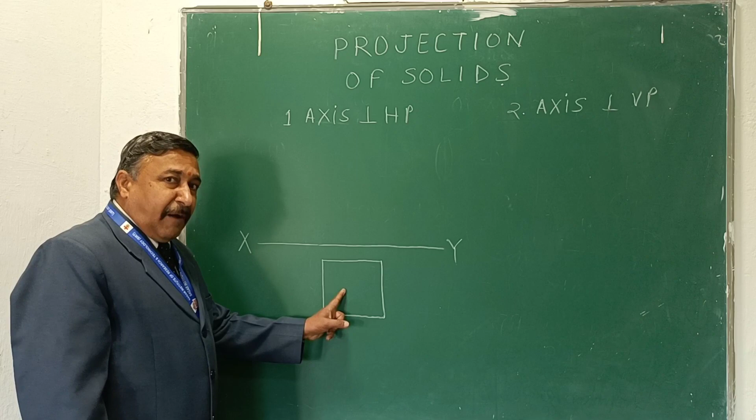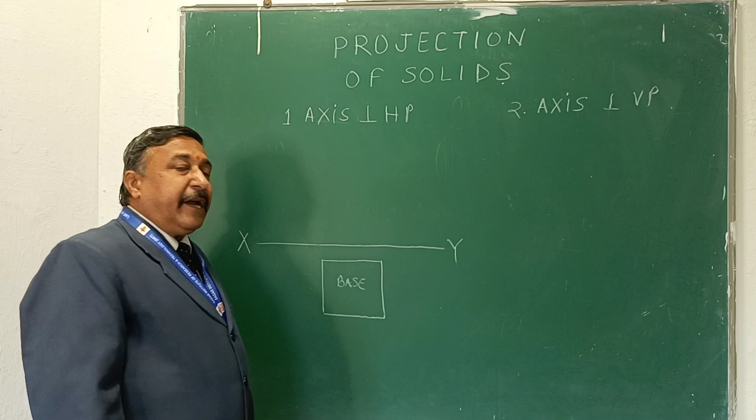So when we draw top view, that is base, we always have to draw base first. Remember this: every question of projection of solid starts with base. We have to first observe in which view the base is visible, either front view or top view, and start our problem from there. So this is our base, square prism, square.

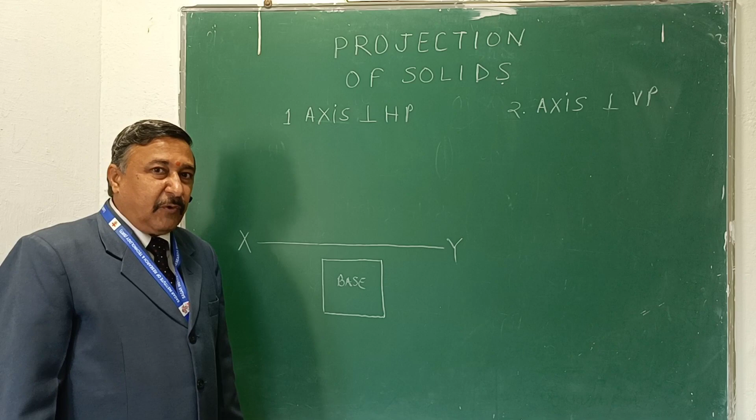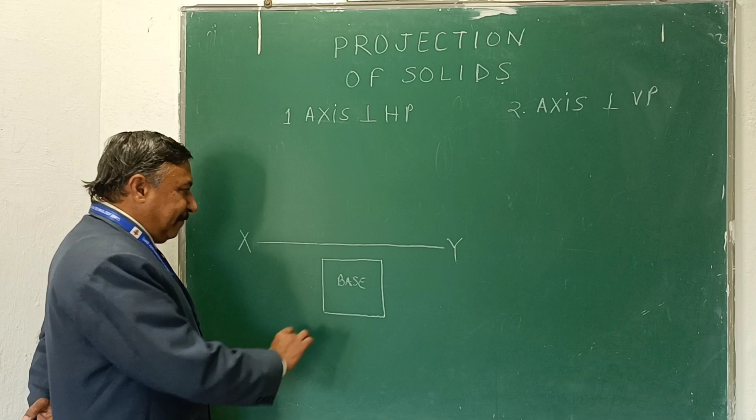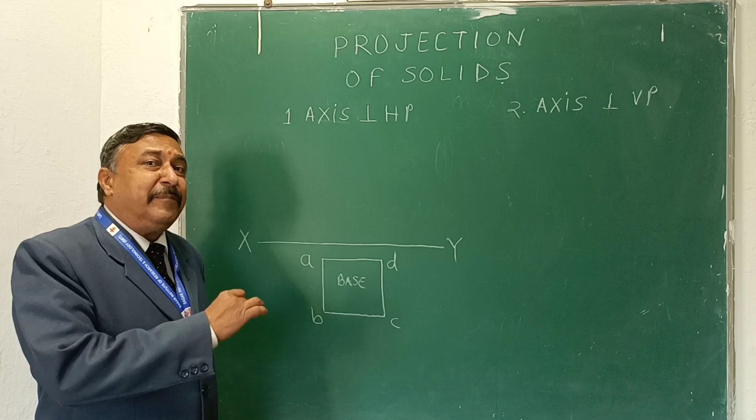Now we have to name it or label it. This labeling is very important. As usual, if we name A, B, C, D - but this is a square, a square plane.

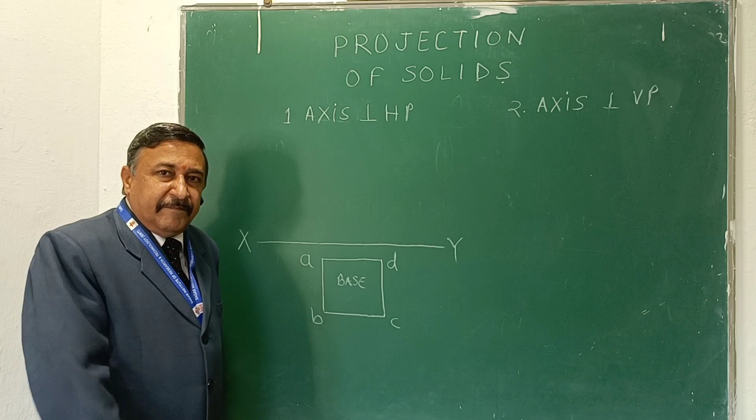Just imagine how many squares of this type are in a square prism. There is one base and one top, meaning there are two squares in square prism. So we have to name the second, the top, also like this: A, B, C, D, E, F, G, H.

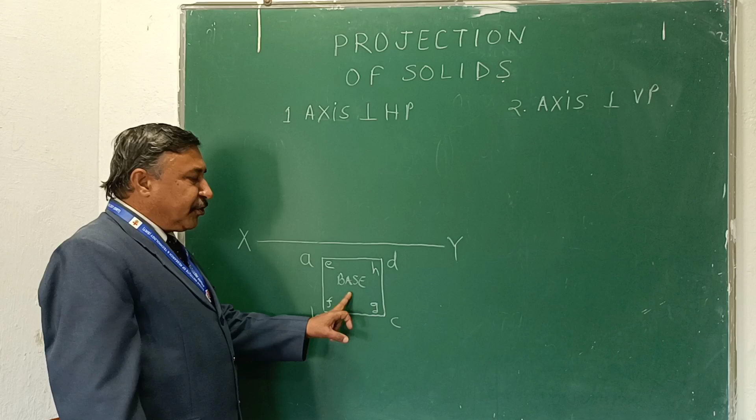Both are overlapping, just one above the other. This is the system of labeling or naming in solid, because this shows there are two squares in this solid, and this represents the prism or base of prism.

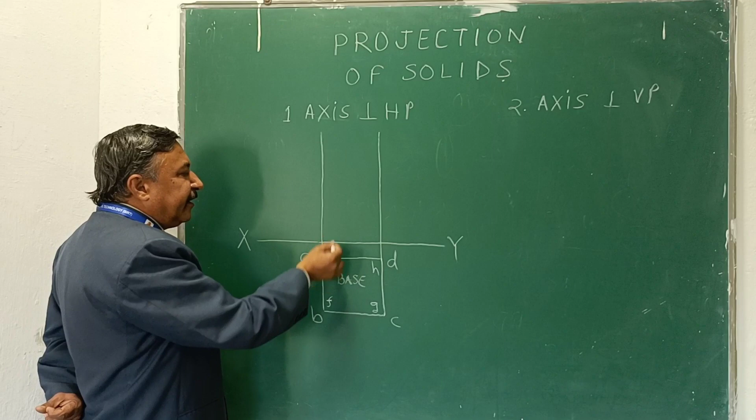Now we have to draw the next view. Just project it, and this is the base. Now we have to draw the face, meaning what is the height of the axis of prism. So the height of axis of prism we take here.

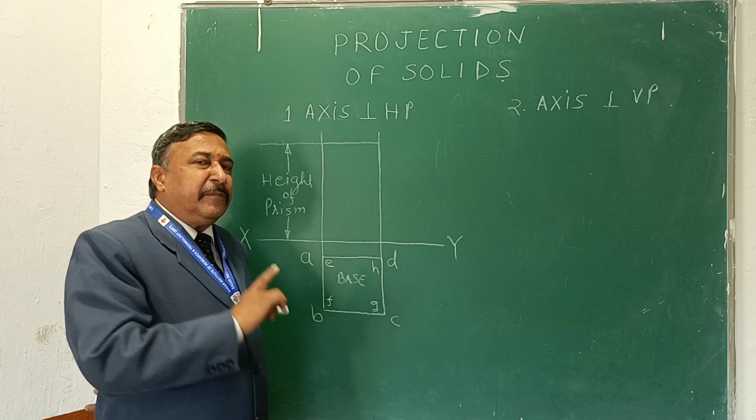This is the height of prism or axis, whatever is given in the problem, and we just close from here, so this is one rectangle visible. If we observe the square prism from front, we have to observe only one face - another face is just perpendicular, so it is not visible.

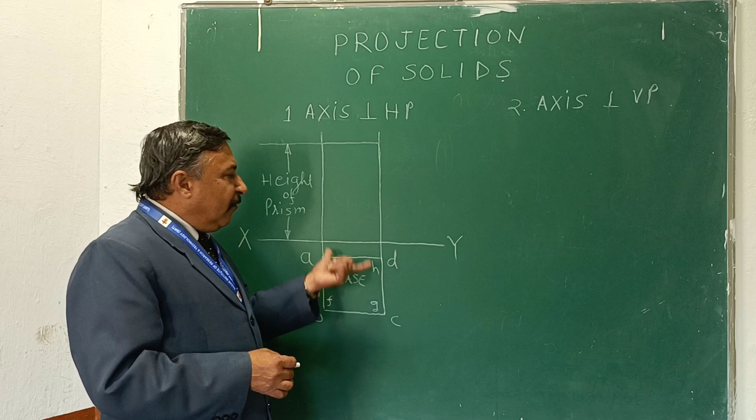Another face is also not visible, and the back face is also not visible, so only one face is visible. Now we have to show axis in this prism, so at center - or we can find the center like this - draw the rectangle, draw the diagonals of the square base.

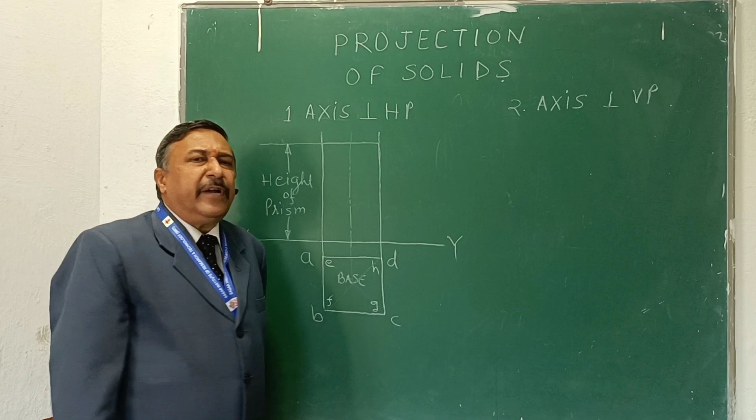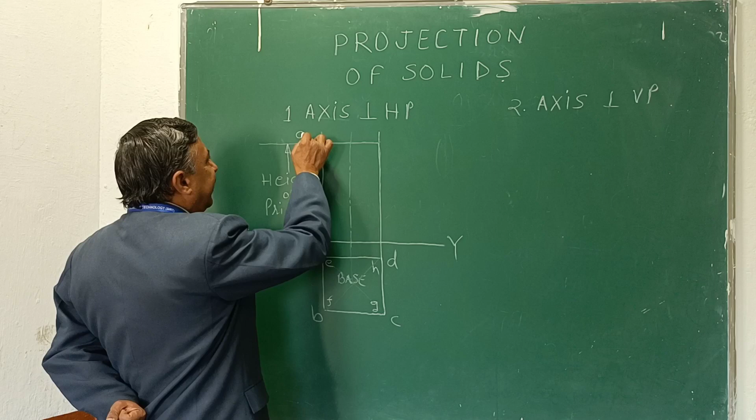This projector gives you the position of axis, so we have to show axis also. Now labeling A, B, C, D - suppose this is top, this is the top square. So we have to name here A dash, B dash, this is C dash, this is D dash, like this is E dash, F dash, G dash, and H dash.

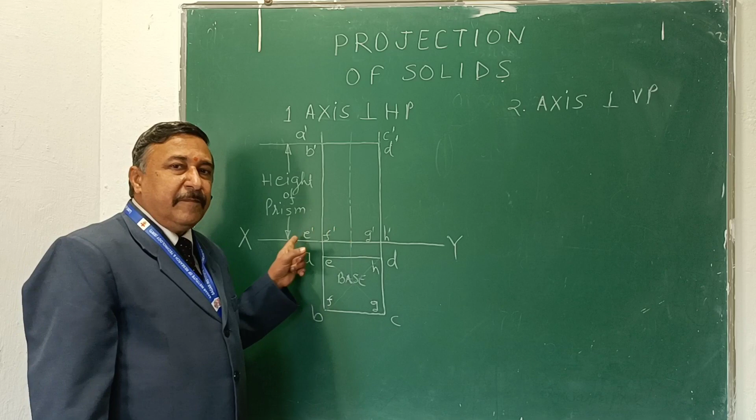So one naming right, here outside the view we mark at the top, and inside naming we mark at bottom. So this is the position axis perpendicular to HP, and this is the system of drawing projection of solid - complete naming, complete showing. No need to write face here, actually this is face, but no need to write face or base, this is only for understanding point of view.

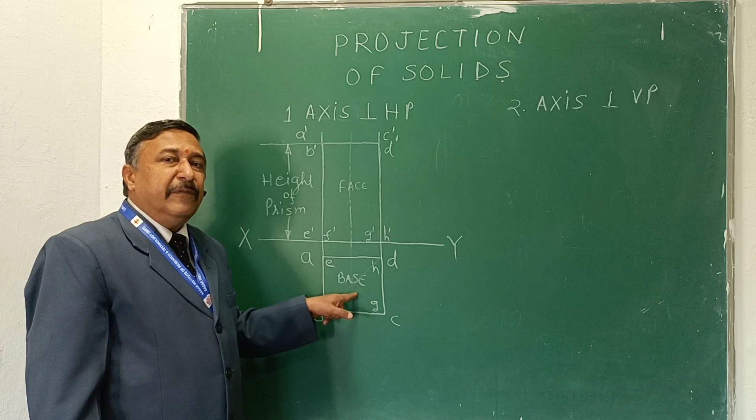Now if we have to draw the other position of axis, that is axis perpendicular to VP - if axis perpendicular to VP means we can think that base is in the VP, and when base is in the VP, it will be seen in front view. So first we have to draw front view instead of top view, because base is in front view. So if base is in front view and face is in top view, it is axis perpendicular to VP.

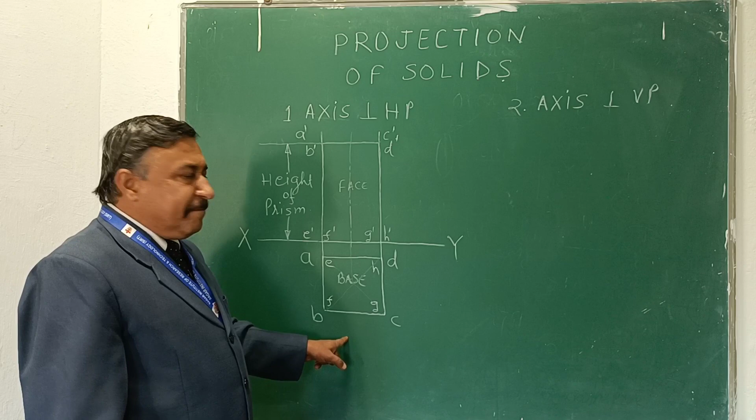So it is just the opposite position. I have to draw and complete this also, showing how we draw axis perpendicular to VP. You know this whole process - first we have to draw base, so this is our base.

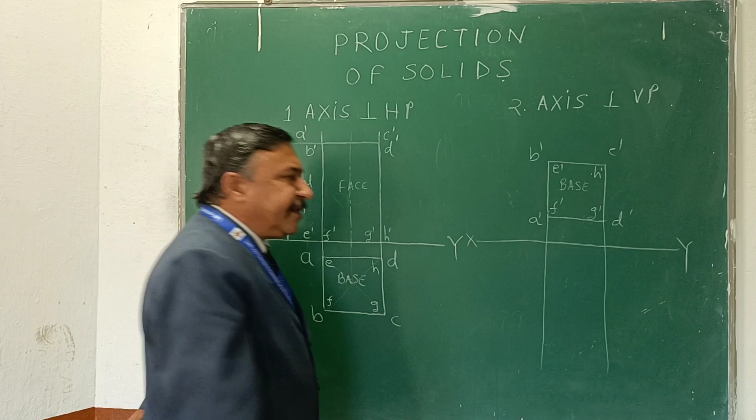This is our base, and it is in front view because the axis is perpendicular to VP. Now we have to project it and complete this face.

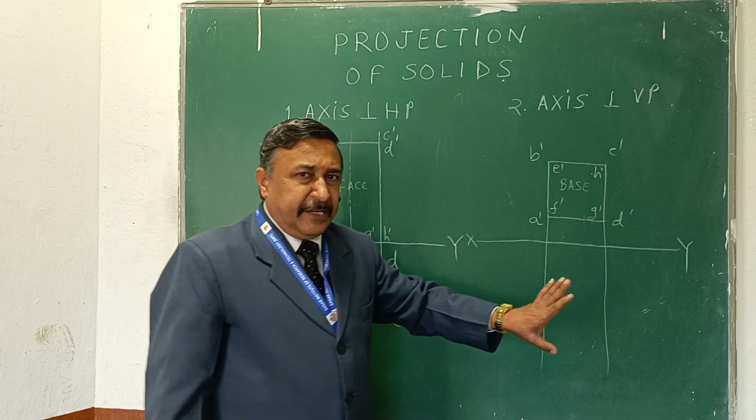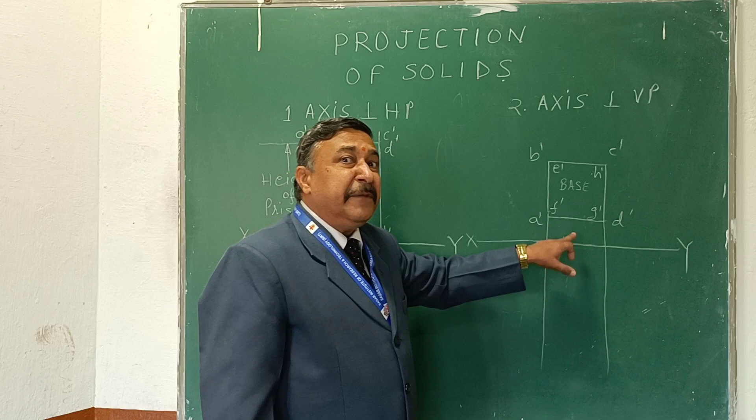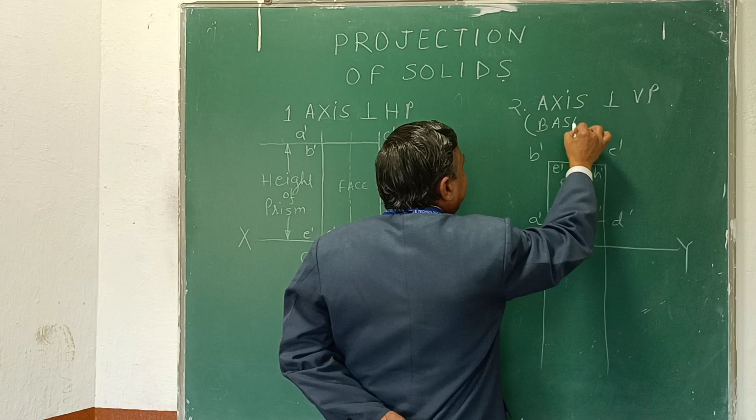If the base is on HP, meaning only the axis is perpendicular to VP and the base is not in VP, then we can start from anywhere here. But if it is given that the base is in VP, we start from here. So we can write here base in VP, and just like this, we can write base on HP here. This will clear any type of confusion.

So we start from here. This is the height of the axis, either height of the axis or height of the prism. This is height or length of axis, anything.

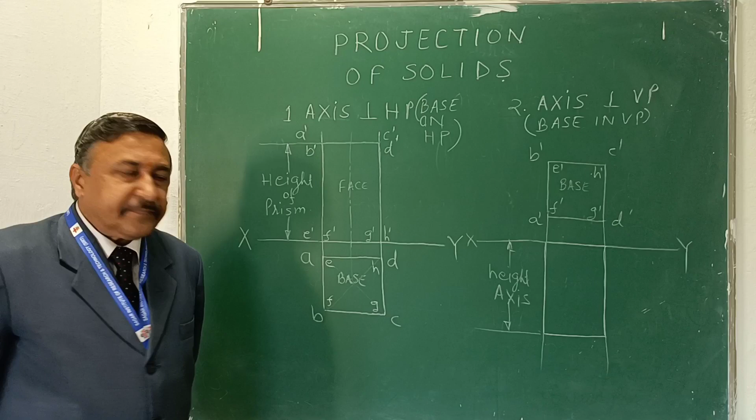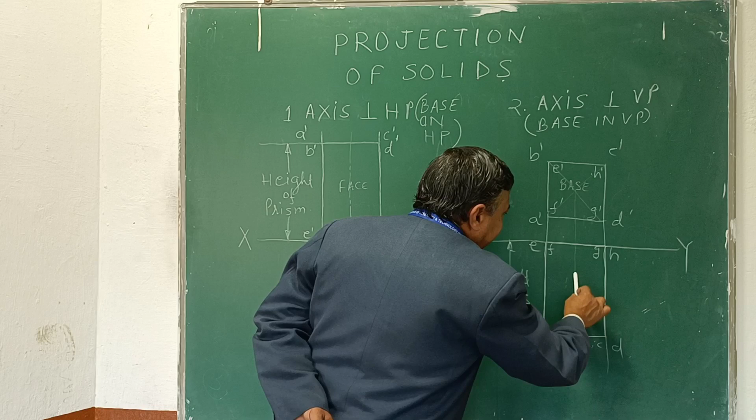So just like this, you know the process. The process is same: mark these outside points, either at top, and these inside points at base, anywhere, no problem at all. Now mark the position of axis. By drawing the diagonals, we can draw the position of axis. This is the position of axis.

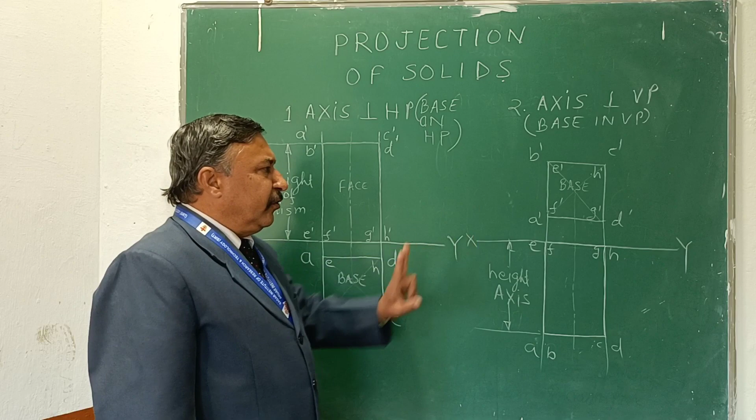So these are the two questions: axis perpendicular to HP and axis perpendicular to VP. Now you know both the positions.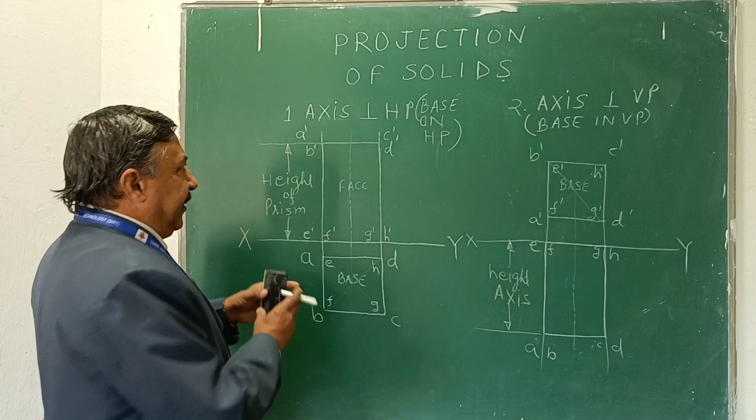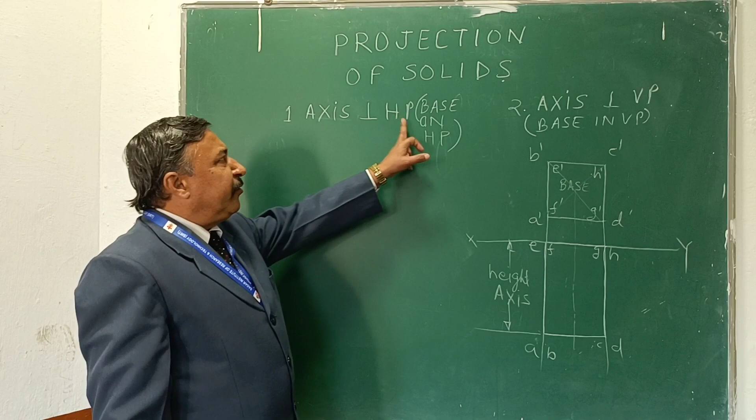Same thing: axis perpendicular to HP, base on HP, but the example is of a square pyramid.

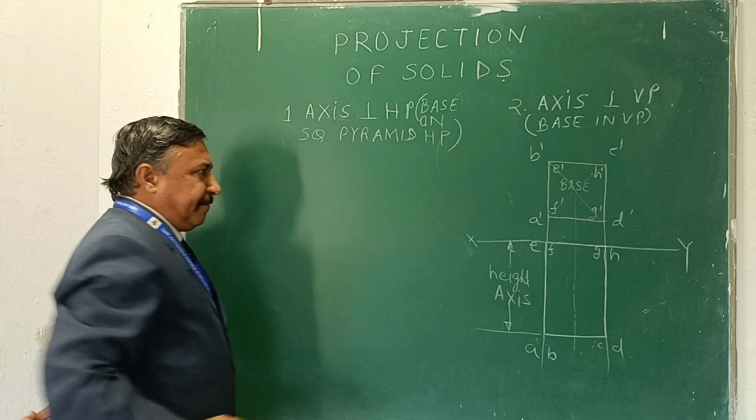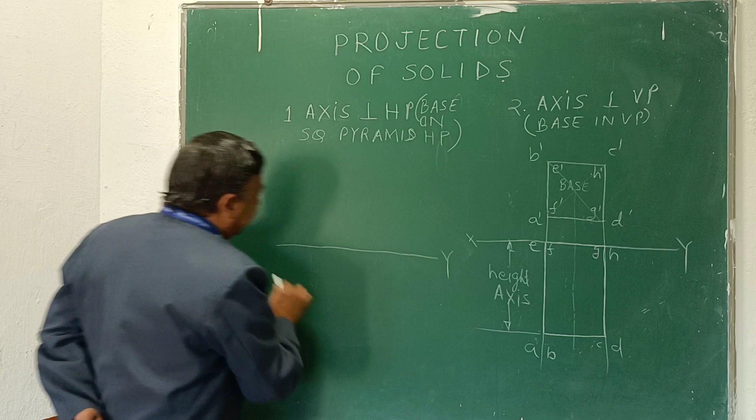So what are the changes you will see here? How do we draw the projection of a pyramid? Same thing: you know that base on HP means axis perpendicular to HP and base comes in top view. So first we have to draw the top view. This is our top view. Square pyramid has a square base.

Base square. But now just observe that in the square pyramid, the apex is also seen from top view. Apex is also seen in top view. How do we find the apex? Just by drawing the diagonal of this square. So this is the apex.

Now, not only the apex is seen, from apex to base corner, the edges are also seen in top view. The edges from apex to the corner of base are also seen in top view. If you observe, these edges are called slanting edges.

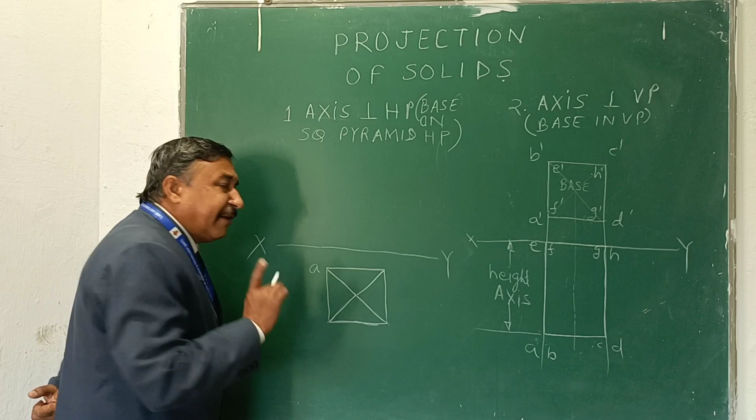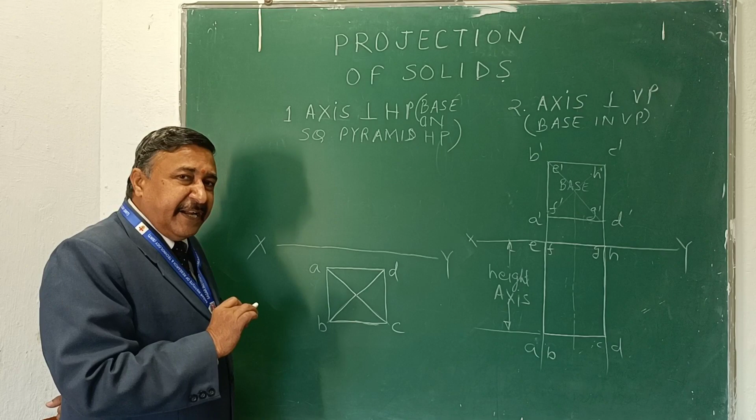These are slanting edges of the pyramid. So there is only one base in a pyramid, so names in ones only. Only one base in pyramid. So this is A, B, C, D - this is the base of the pyramid, and also the apex, it is O, and the slanting edges join apex to corner of base. This is the complete top view of the square pyramid.

So see what is the difference? Base and base. This helps you. There are generally two types of questions, meaning we divide solids into two groups, group A and group B. Group A means all type of prisms, cube and cylinder, and group B is pyramid, cone and tetrahedron. So two types of projection are there: one is prism and another is pyramid.

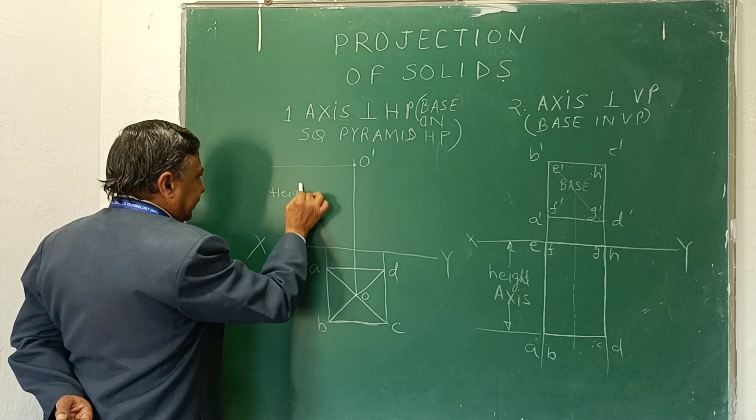Now this is the position of axis, and this is the position of apex. What is this? This is the height of pyramid or axis of pyramid.

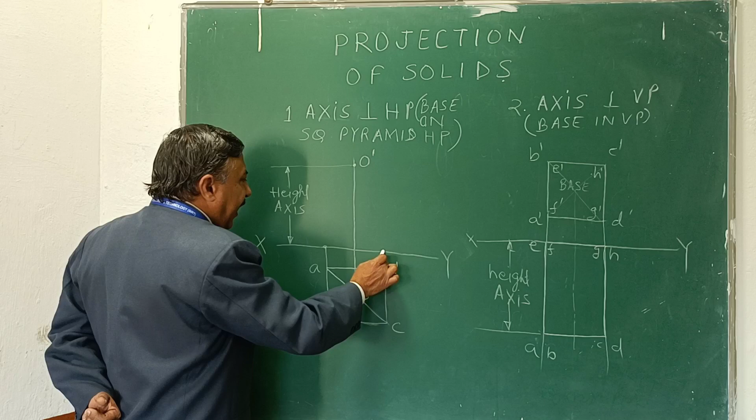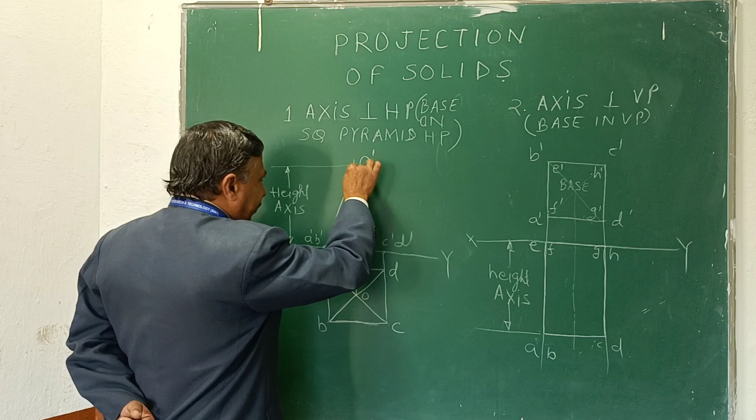There we find the apex. Now join apex to these points. These are the base points: this is A dash and B dash, and this is C dash and D dash. So we just join these apex to base points, like this, same in this case below.

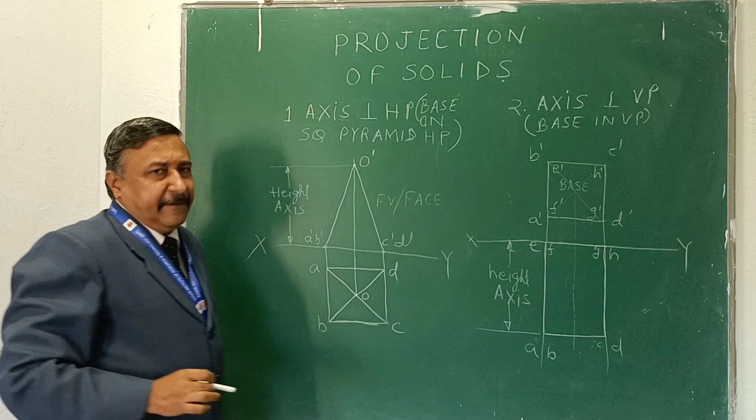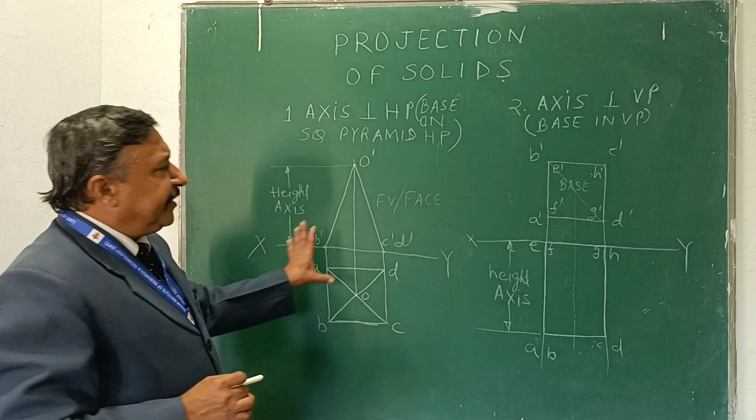So this is the front view or face, front view or face of pyramid. This is the front view or face of pyramid, this is the face of prism, this is the base of pyramid, and this is the base of prism. So see the difference, very clear, remove all your confusions about how we draw prism and how we draw pyramid.

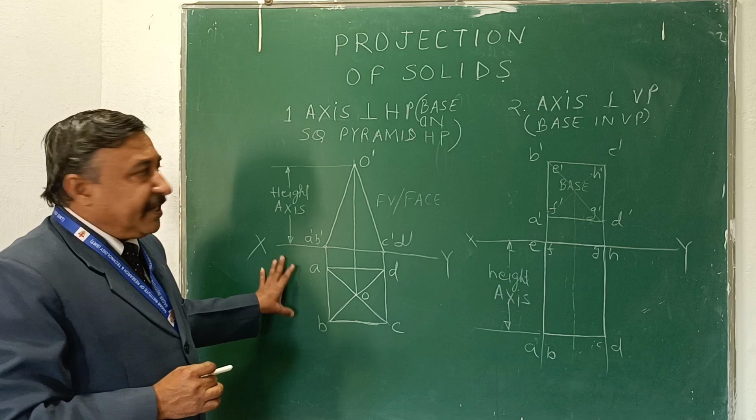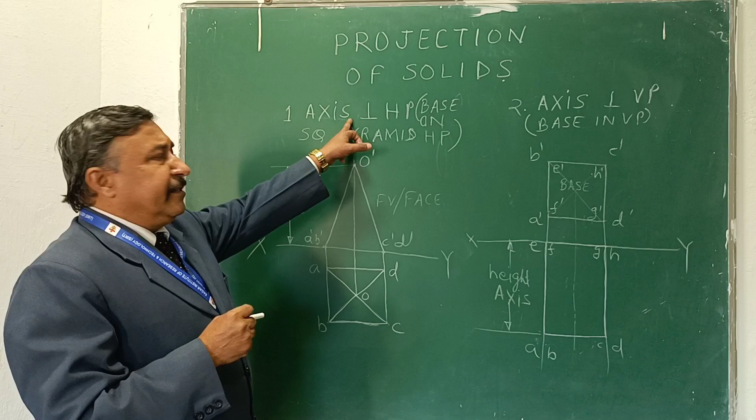And these are two basic positions, that is axis perpendicular to HP and perpendicular to VP. So in the next class we go further and draw the other positions of axis. Okay, bye.